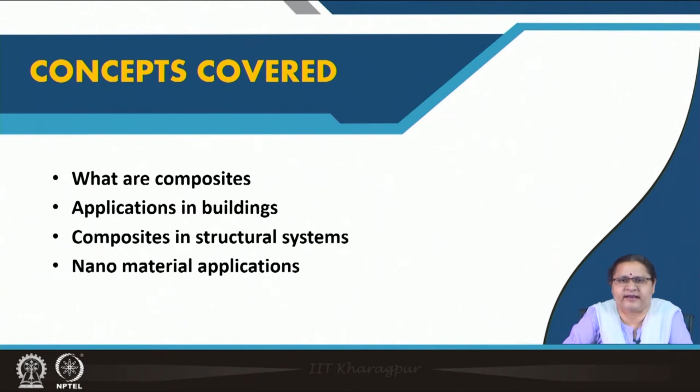As you know, composites are a combination of two or more materials. As you had seen, thermal insulators were not single items, but applied within a system, within a framing, and then covered with something. That is why I included composites in this section, and we will discuss what composites are. We have come across a number of composites by this time, but it is just to reiterate what composites are, their application in buildings, structural systems, and some nanomaterial applications added to items to make them better working and more functional.

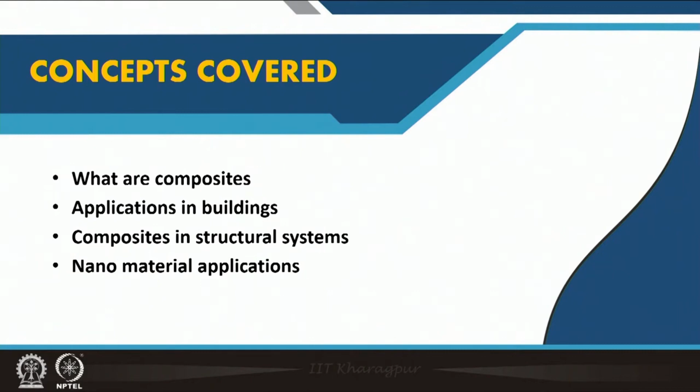Coming to what are composites: composites are engineered combinations of materials that result in a finished material with better overall properties. We had seen sand, cement, and coarse aggregate, but when three of them in the right proportions were mixed, we called that a man-made composite, that was concrete. We had done that in one complete module.

When we did glass fiber reinforced gypsum, we took glass fibers inside gypsum laid so nicely that it gives strength. So it is getting better overall properties, hence it is termed composite. At a microscopic level, each constituent remains distinct, so there is no chemical reaction happening, where sand, cement, all these things bound together with water made the gel and could bind the materials together, but the materials did not change property.

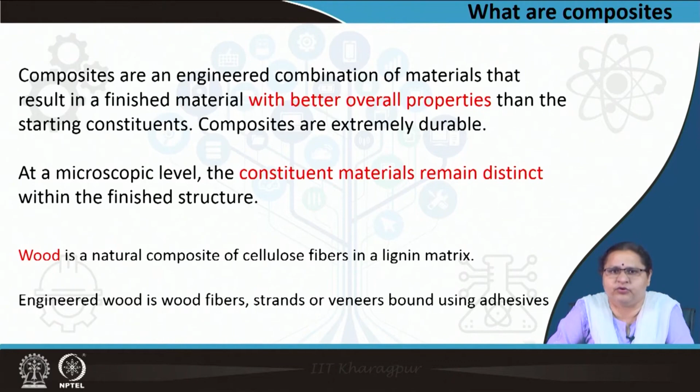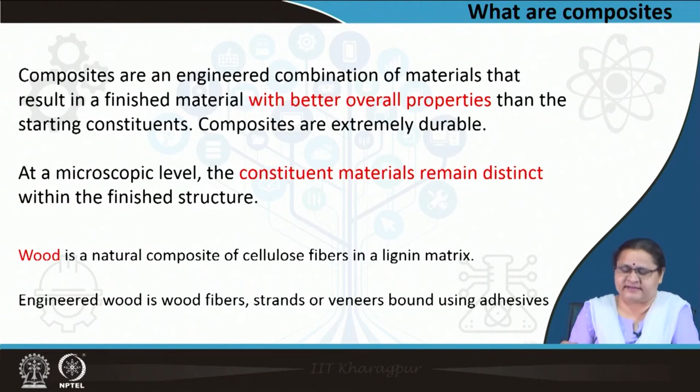Wood is a natural composite which grows naturally, where cellulose fibers are held together in the lignin matrix to give it strength. When we talk of engineered wood, the natural wood is there, but small pieces of wood, strands or veneers in case of plywood, are added using adhesive. So adhesive becomes the binder, and the fibers or pieces are the wood pieces. So engineered wood is a man-made composite, whereas wood is a naturally occurring composite.

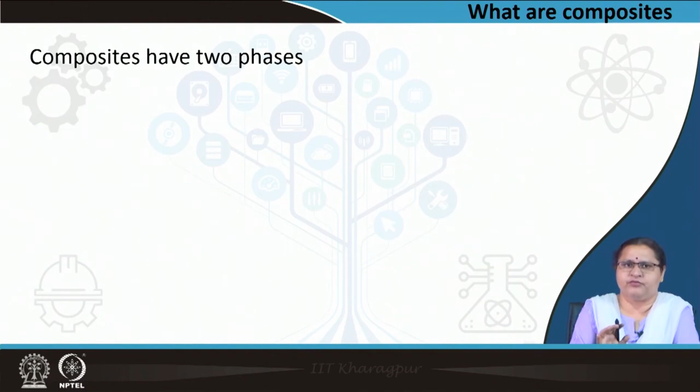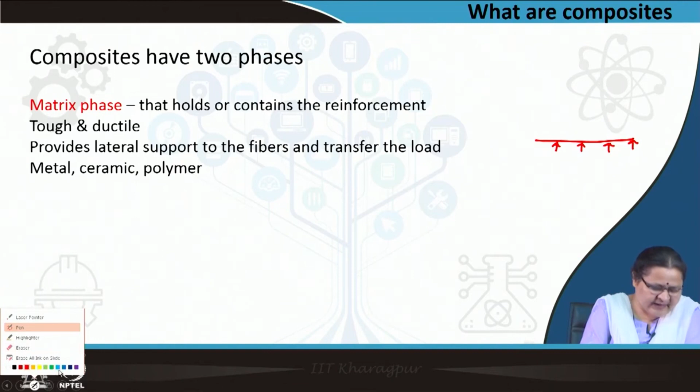So if we look at composites precisely, we see they have two phases. The first is the matrix phase, that is something which holds the reinforcement or the particles, helping the reinforcements become more tough and more ductile. They provide lateral support. So if there is reinforcement, it will be supported at certain points with the help of the matrix. The matrix may be a continuous layer giving support, or it may be intermittent support, where the reinforcement may be covered on different sides with the matrix, with the binder - that is the matrix phase.

These lateral supports to the fibers may be in the form of metals, ceramics, or polymers, in any form.

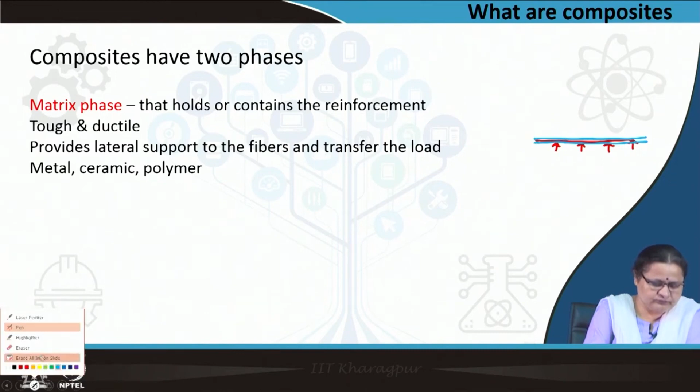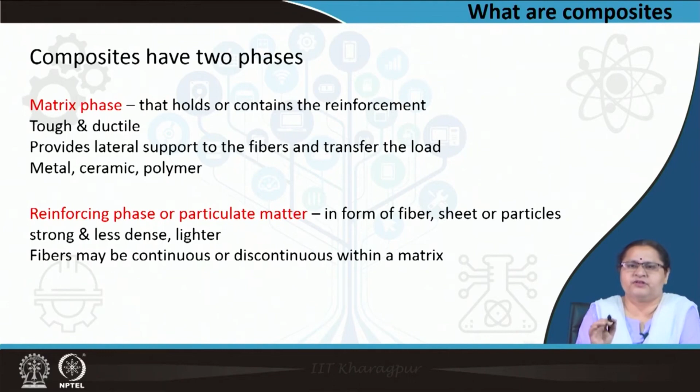Next we have the reinforcing phase, that is the fibers or the particulate matter. In case of MDF boards, it was wood fibers, wood particles. So those are set into the matrix. The reinforcing phase may be fibrous or particulate matter, and they are strong, less dense, light, but bound by the matrix to give them continuity and allow them to behave as one unit.

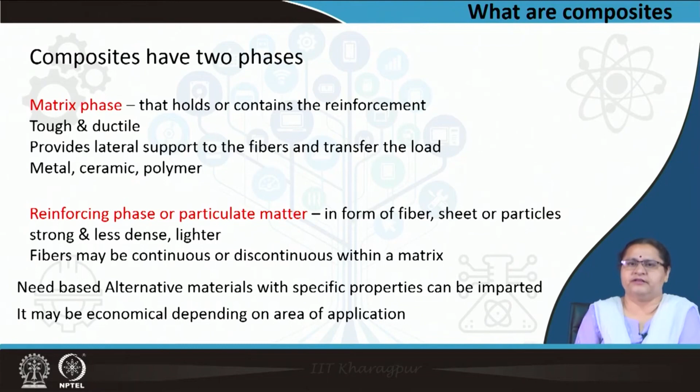So need-based alternative materials can be obtained by changing the percentages of the matrix or the reinforcement. You can get special characteristics, and it becomes economical in the area where it is applied. For example, MDF boards may be of three types: light density, medium density, high density. By applying different amounts of pressure and different amounts of particles, you get three different kinds of wood composite. Now you understand why I said initially that we have already learnt many composites.

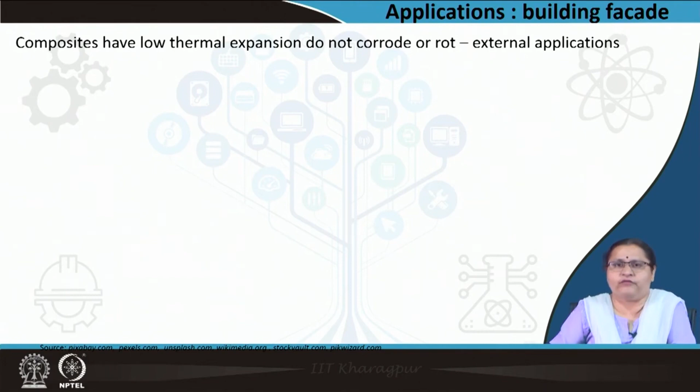Now, coming to the applications of composites in building facades. As I said, you get special properties. Composites usually have low thermal expansion and they do not corrode or rot, because we are improving the property. So we can use composites for external applications. We have seen precast slabs, which we discussed at length in the precast items module.

Structurally integrated panels, or SIPs, have foam, EPS, or polyurethane sandwiched in between with a coating of maybe metal sheet, oriented strand board, or any other material that can withstand external conditions - you get a structural integrated panel. What is the advantage? These provide thermal insulation while being lightweight. Where do we apply them? We can apply them where the structural system is there, using these SIPs as filler walls.

Lightweight gives the other clue, it makes the entire building load less, so you can choose this for high-rise buildings, tall structures.

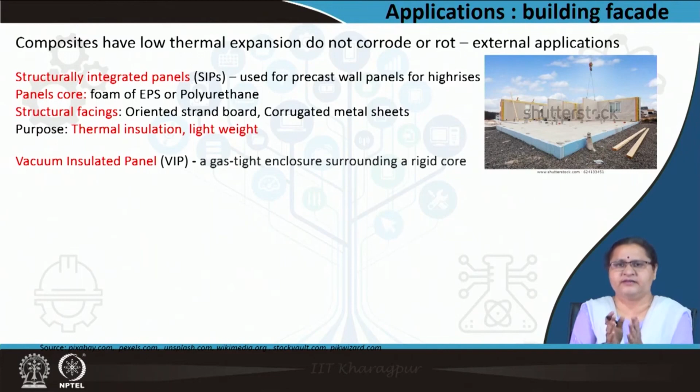Coming to the next one, it is vacuum insulated panel. Here also the gas between the two members is evacuated out. When it is evacuated out, the inside becomes vacuum, hence it gives insulation, it becomes airtight, no air can enter. It is vacuum and it is light in weight and can act as an external facade.

We have pultruded composite panel. This is also similar, where you are using resin coated glass fibers through a heated die. So glass wool can be passed through resin. Resin is the matrix and glass fiber is the reinforcement, and you can give any desired shape. You can get pipes, you can get walls, you can make facades, you can make door and window frames with glass fiber reinforcement within the resin. So the major important point, the shift from the other two, is it can take any shape, because the resin here is a thermoplast.

Aluminium composite panels, we have discussed this when we did metals, non-ferrous metals. You can go back and see how it is made. It has a very thin core of polyurethane foam, and the facing and backing, the two layers supporting the polyurethane foam, is aluminium. That is lightweight, soft, you can bend it, give it any shape. The Epcot center was made of ACP panels. Many buildings, you see in the picture, a circular kind of facade has been developed by using aluminium composite panel.

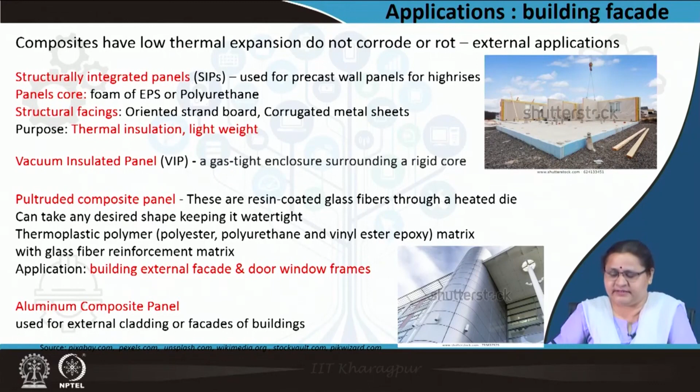So we have gone through many of these materials earlier. Coming to other applications, as I told you, glass fibers as reinforcement within plastic, pipes, sheets, corrugated sheets as you see in the picture. See the wood section here, the window section, frame which replaces wood, which replaces aluminium, which replaces steel, have now come into use. So it has reduced the use of metals, it has brought in alternative material in use, and it is giving better results than the others. These are not getting corroded like iron, these are quite rigid, hard, durable.

Pipes made with fiber reinforced plastic for high-rise buildings, because the water is coming from say 200 meters. The pipe is facing that water regularly at a very high pressure. Its linings may get corroded, the internal walls may get corroded, but if it is made of fiber reinforced plastic, there is no corrosion.

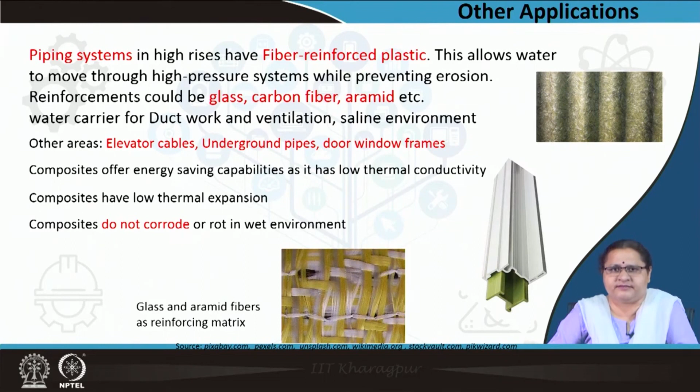We come to another important aspect of using composites, that is in the structural system. How can we get benefit from composites in structural system? Here you see some pictures where black denotes the iron part or the metal part and the grey color is the concrete. It is not like regular reinforcements.

You see here there is an I section, two I sections together. Here you see one I section. Here you see it is entirely a solid bar, square bar. Here you see it is an entirely solid core of iron. Here you see within the I section there are again further reinforcement bars and it is filled with concrete. Same in the other pictures. These are examples of composite columns.

Here you come and see composite beams. So you see this I section is a beam, is the major beam which is running horizontally, and onto which there are rods, that is reinforcement, and there is a connector between the two. So the entire beam is not a simple concrete beam or neither a simple steel beam. Rather it is having reinforced beams as well as an I section beam, steel section. Here also you see the slab is on the top, that is projected on both the directions, but here is the I section which is behaving as a composite member.

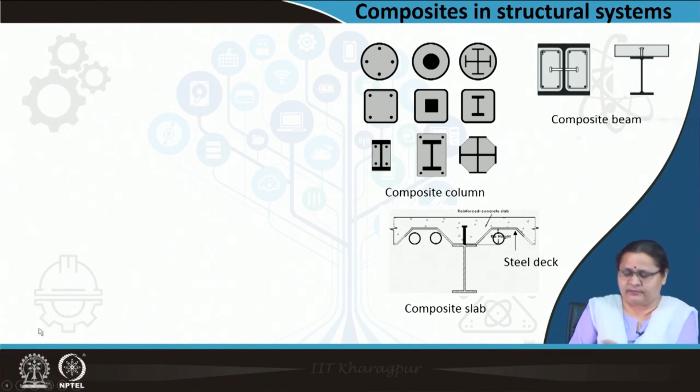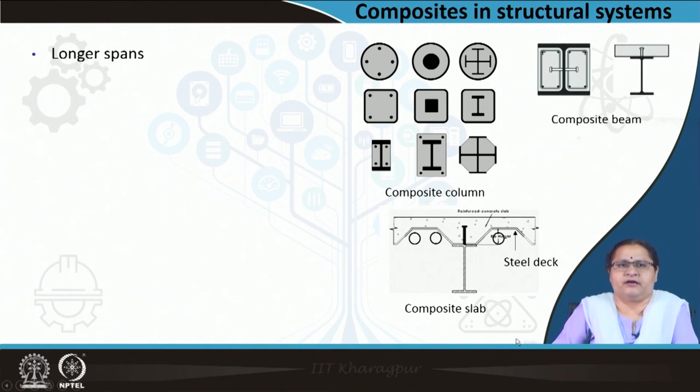Let us come to the major points. We can get larger spans using such kind of beam column system, so that means you will get uninterrupted space. We need uninterrupted space where? Say auditorium, say office, say multi-purpose spaces, sports arena, where we can go for longer spans.

We need thinner slabs through use of steel decks. The deck itself provides a shuttering to the concrete which is being added on top of it to give it a smooth floor. Obviously, you get benefit on height and hence it becomes economical.

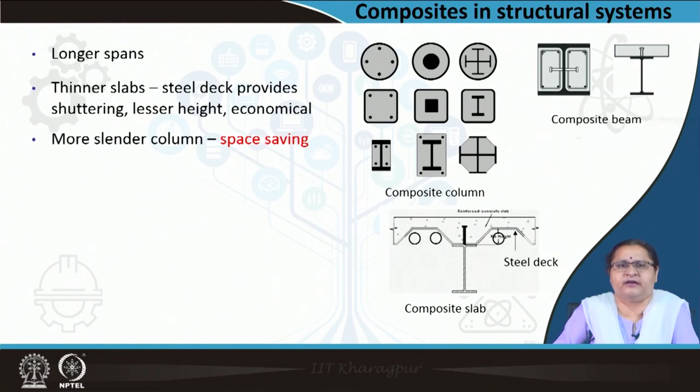Coming to the columns, they become much slender. That means you can avoid heavy columns. That means dimension of say 1 meter by 1 meter reduces to say 500 cross 500. So that becomes the space saving. Your one-fourth of the space is required than a conventional column beam structure.

You get more design opportunities because you are getting much of uninterrupted space, so you can play with space. Lesser weight because you are reducing height, you are using maybe some composite panels for the walls. So finally it is reducing the weight.

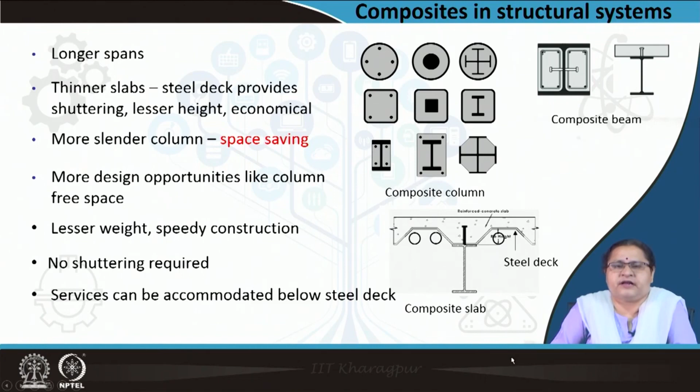You do not have to wait for 28 days because of curing etc., because it is already cast on a shuttering, so further construction work can be carried on. So you get speedier construction. Shuttering is not required, as I have already mentioned. Services can be accommodated below the steel deck, and mostly we find applications of these in high-rise buildings.

So I hope you could get through that the application of composites in structural systems, which you will see more in high-rise building application, tall building application, you will see these kind of composites being applied.

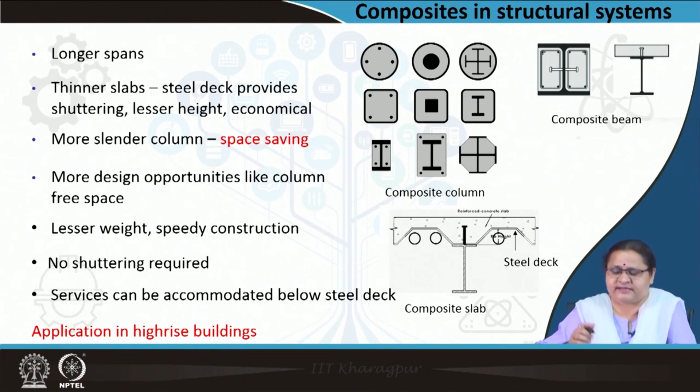But another group of composites are also there, applications as a coating, which we also came across when we did glass. We had self-cleaning glass, which had a coating of titanium oxide which helped it to clean or clear the glass time to time by the application of water or application of sunlight, and had kept the facade clean. That was a nano application.

Nanomaterials can also go into composites. Carbon nanotubes can go into concrete to improve its characteristics. Silicon dioxide, nanosilica, improves durability of concrete. Copper nanotubes in steel helps to control the cracking.

I am not going into details. Vanadium, molybdenum, they improve the strength of steel. They are only applied as a very thin layer. Lignocellulose of wood, we had learnt lignin and cellulose, so lignocellulose of wood is nanofiber of 1 to 100 nanometers used to reinforce concrete. So you can understand that at nano level, that is one billionth of a meter, also these materials can improve properties.